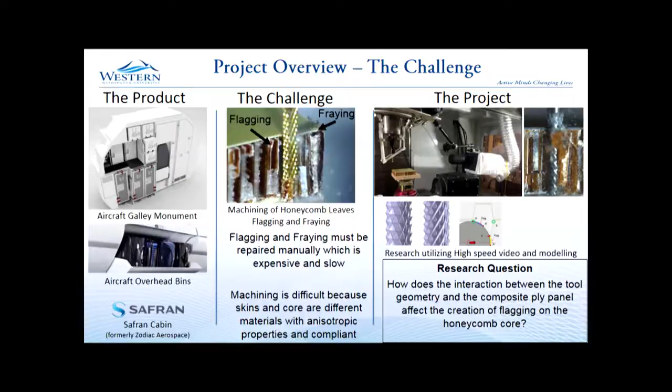So the project that we came up with was to utilize high-speed videography and modeling to try and study this problem. We thought about other traditional methods of looking at cutting. We felt that none of those would work. Things like looking at cutting forces, thermography, acoustic noise. Maybe at some point in time we can look at those techniques, but we decided to simplify and say, let's just look at it first and see what's going on.

And that in itself is not easy because of the speed of the cutter. It runs 15,000 to 20,000 RPM. You have a lot of dust, a lot of vibration, so you really need to have high-speed video to be able to capture that effect.

So that's our problem, and JCATI was really very helpful to help us do this. First of all, it helped us acquire the high-speed video cameras that we used and allowed us to look at machining at 20,000 frames per second. Bet said not to have any videos, so I can tell you we have a very nice website with videos if you're interested in looking at these.

We also spend a lot of time modeling, and the funding was helpful to support the students who did all this interesting work in modeling the cutting tool, modeling the structures that were generated to help us understand how the cutter interacts with the structure a bit better.

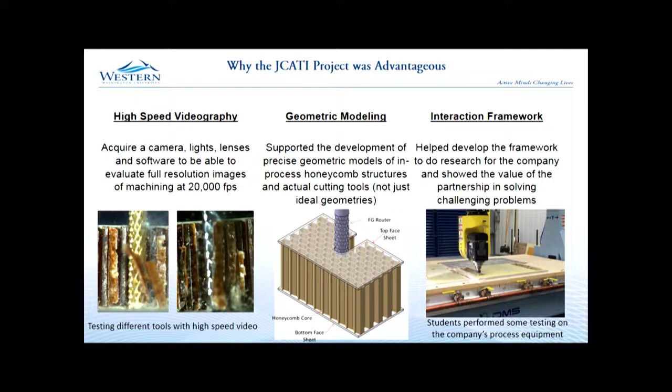And then probably the biggest thing that it helped was to help us establish an interaction framework with our sponsor. So we were able to really work with them very closely and collaboratively to be able to study this problem, and we were really happy about that.

So just a few insights from the research that we came up with. Those of you who are familiar with machining understand that if you cut a slot, the top of the cutter is referred to as the conventional side, and the bottom is referred to as the climb side. And in machining metals, the conventional side produces the worst result in terms of quality and finish. We found when we did some testing that the opposite was true when we cut these composite sandwich panels.

The climb side, as you can see from the photo there, you have all this flagging that's taking place, which, by the way, I should have mentioned previously, you have to remove before you can assemble. So Safran spends a lot of time with manual reworking of the panels before they can actually start assembling them together, and it's very time-intensive and costly for them.

So we found that this was one issue that was actually the opposite, that actually the conventional side is the better side when cut, which means that you have to cut counterclockwise around the panels to produce a better result.

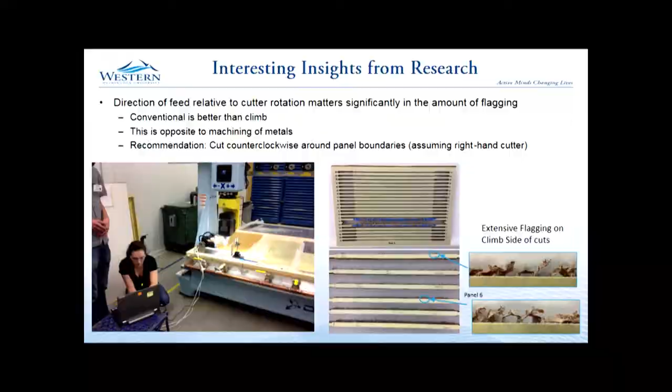The picture over there shows one of our students, Georgia, and she's actually at Safran working on one of their production machines doing testing. So that, again, highlights the type of relationship we were able to develop over the year to be able to actually go into a production facility and set up an experiment on their equipment. And we're very grateful to them for allowing us to do that. Great experience for the students, by the way, too, to actually go in and work on production equipment.

Another insight we had, too, is based on the type of cutters. We found very quickly that Safran uses a lot of different types of cutters, not just at the Bellingham facility, but at their other facilities where they machine, too. And what we found was that certain cutters have better performance than others and can give you a better cut.

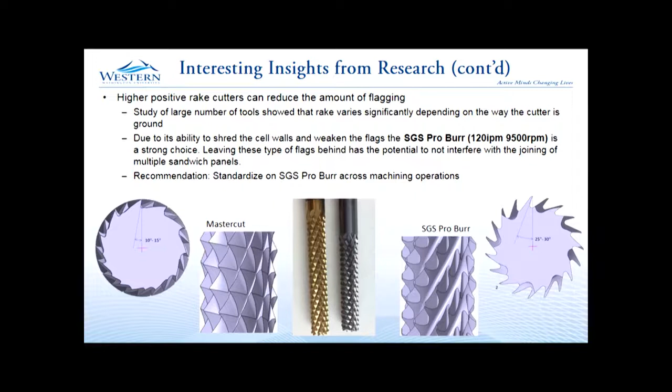So one of the properties we looked at was the rake angle. And if you want to think of the rake angle, it's really the sharpness of the tool. So tools that are sharper, such as the one here on the right, which has a higher positive rake angle, tended to cut better than ones which had a more blunt edge. And this is helping the process planners pick the best cutters. So this information is very useful from that point of view. So this was another important insight that we came up with.

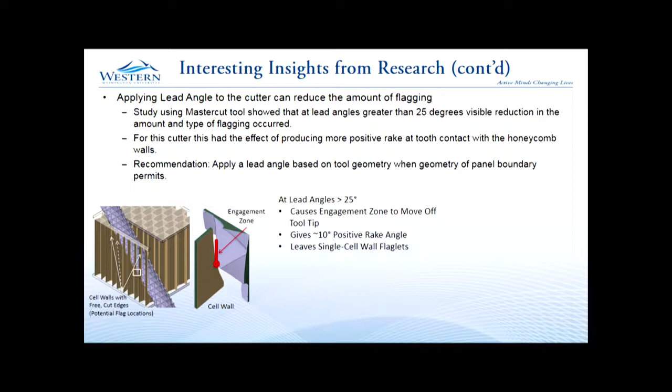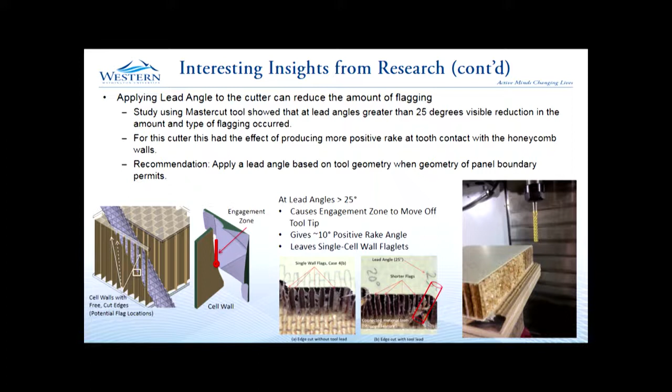And then a final one, too, we looked at actually tilting the cutter into the direction of feed to see if that improved the cut. And we did find that that did help quite a bit, depending on the cutter you used. We found that, for example, if you tilted 25 degrees, you got a slightly better cut where the flags were a lot shorter. And again, that reduced the amount of rework that was necessary.

So again, with a 5-axis machine, which all their routers are, they can actually do that tilting in the direction of the feed, although it's limited in some ways because you can't do every single shape with it. It's still something that can be applied in certain circumstances. So these are 3 interesting insights that we came up with from the research.

Moving ahead to talk about the ripple effect, during our discussions during the time of the project, we had a lot of back and forth about different things we could be doing for the future. And one of the things that we talked a lot about is another problem which deals with the assembly of these panels, which requires inserts to be bonded into the panel.

And the problem with that is that it's very manually intensive. So once you machine a hole or a pocket in the panel, the workers have to manually insert this insert, and then they have to inject glue around it so that it bonds to the panel.

And the problem with that is it takes from 1 minute to 2 minutes per insert. And some of the large panels have up to 50 to maybe even as much as 75 inserts in them. So there's a lot of time involved. And it also takes up a lot of footprint in the factory because some of these panels can be very large too.

So we came up with this idea in talking to the engineers about trying to automate this by integrating this process onto the routers. In other words, design a robotic end effector that places the inserts after the pocket is cut, and then inserting the glue around it and having those inserts bond in before the panel is taken off the router. And from those discussions, this year we were able to get going 3 integrated senior projects for our students involving 8 majors to actually try and solve this problem.

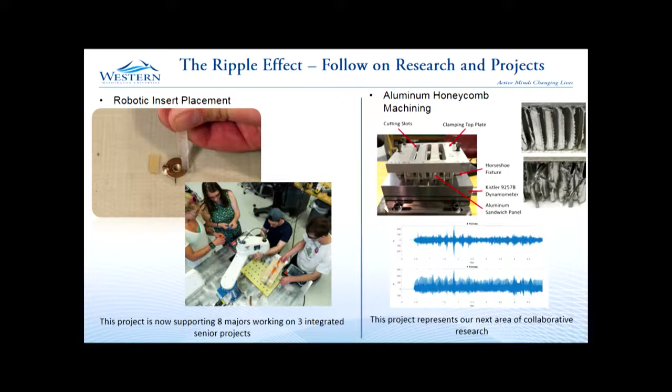A couple of other things that we did too is we started looking at another type of honeycomb structure, which is aluminum. We actually picked the more difficult material to start off with, the composite material, because of the different properties. But we're thinking that we can learn a lot by looking at the aluminum panel too, and correlating the results, trying to understand really what the mechanics is that's happening. And again, Safran is helping us a lot by providing us with materials to help study the cutting effect on aluminum.

We've also spent a lot of time reverse engineering cutting tools. Because if you look at the vast range of cutting tools out there, they come in very different sizes and shapes. And the manufacturers don't give you information about them because it's their proprietary shape. So we're using photogrammetry to try and reverse engineer cutting tools so that we understand better what their properties are and how they impact the cutting that's taking place.

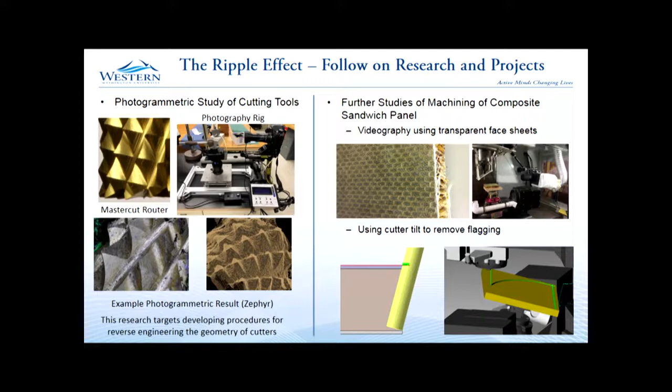And we're also looking at tilting the cutter so that it undercuts the face sheet. And they can do this because they have machines where the head tilts. And that's a way to undercut and maybe remove some of the flagging to help with the assembly. So these are some ripple effects that we're excited about. We have projects that are going on, the senior project, and we have students that will be working on these for the foreseeable future.

And then just to mention that there is academic production. I know this is not supposed to be an academic talk, but just to point out that we have published at ASME, and we also have one that we have to present not too long off in June at NAMRC on this work. And none of this would be possible without the JCATI grant that we've gotten.

So in conclusion, we feel this was a very successful collaboration with our industry partner that has yielded some very valuable insights into the machining of honeycomb sandwich panels. Really and truly, to me, the big thing that came out of this was the strong working relationship that we now have with the process planning group at Safran's Bellingham facility. And this new senior project is one good example of something that would not be happening if it weren't for the funding that JCATI provided.

And we see additional projects in the years to come. We're already in the process of talking about projects that would not be possible if we hadn't had this collaboration through the funding provided. So we are very happy and thankful for the funding that was given to us.